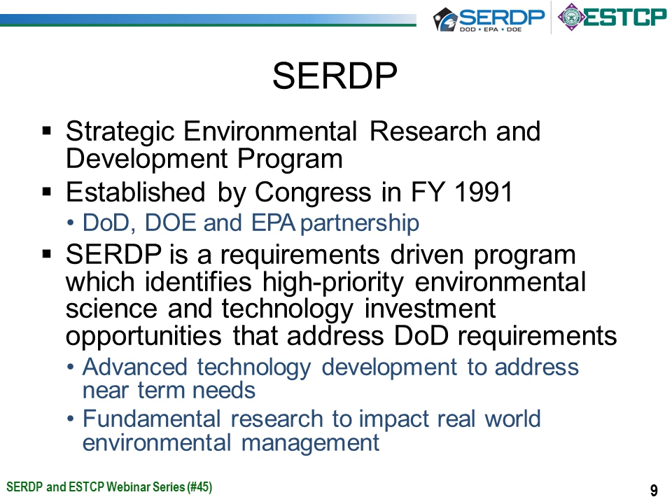Thank you, Jennifer. I'm pleased to welcome everyone to today's SERDP and ESTCP webinar. So, SERDP is the Strategic Environmental Research and Development Program, and it was established by Congress in 1991 as a partnership between the DoD, the Department of Energy, and the EPA. SERDP's mission is to identify and address high-priority environmental science and technology opportunities that focus on DoD requirements. SERDP funds both fundamental research as well as advanced technology development, which can ultimately impact real-world environmental management.

ESTCP is the Environmental Security Technology Certification Program. In this program, we demonstrate innovative environmental and energy technologies. These investments capitalize on past investments under SERDP or other research programs, which are designed to transition technologies out of the lab and into the field. Especially important in all ESTCP demonstrations is the ultimate transition to implementation and regulatory acceptance.

SERDP and ESTCP are complementary programs, with much of SERDP research and development occurring at the lab and pilot scale, with occasional field efforts, while on the other hand, ESTCP demonstrations are primarily at the pilot and field scale, although occasionally supporting lab efforts are conducted.

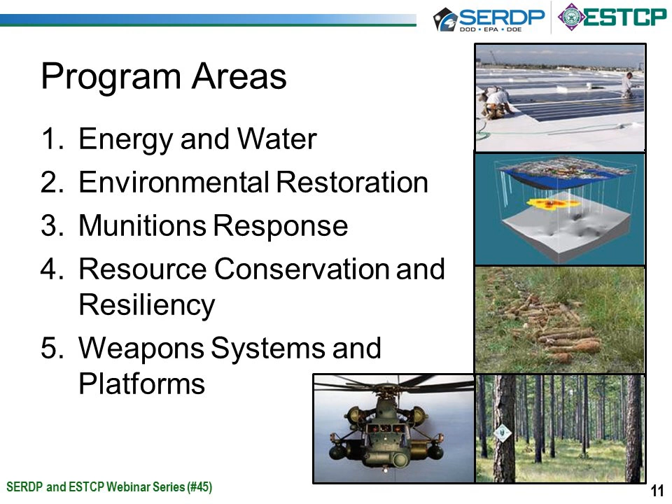There are 4 program areas in SERDP and 5 in ESTCP. Energy and water program areas are only in ESTCP, while the other 4 - environmental restoration, munitions response, resource conservation and resiliency, and weapon systems and platforms - are SERDP and ESTCP programs managed jointly by a designated program manager.

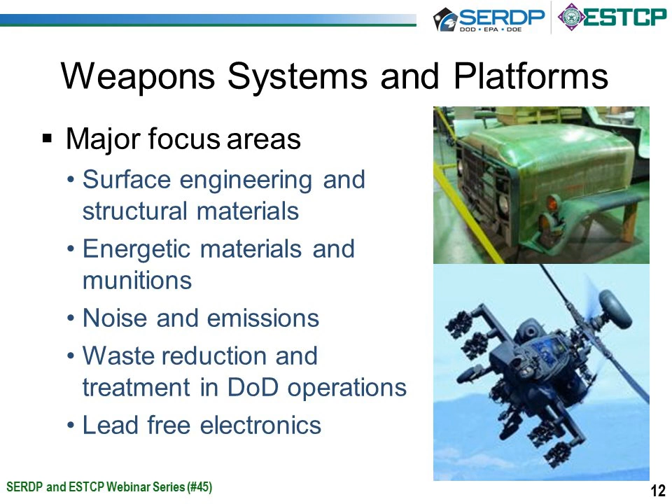Today's webinar is focusing on research and demonstrations that were conducted under the Weapon Systems and Platforms program area. This program area has 5 major focus areas, including surface engineering and structural materials, energetic materials and munitions, noise and emissions, waste reduction treatment in DoD operations, and lead-free electronics.

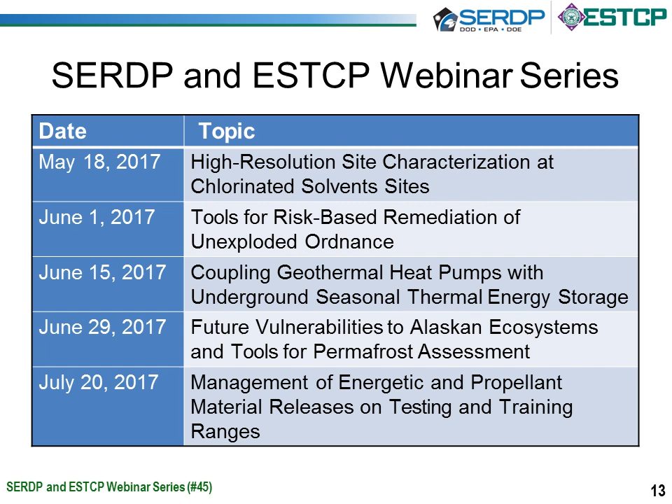Okay, so our webinar series highlights research and development efforts from each of the 5 program areas. And as you can see, upcoming webinars will cover a broad range of topics, including high-resolution site characterization at chlorinated solvent sites, tools for risk-based remediation of unexploded ordnance, coupling geothermal heat pumps with underground seasonal thermal energy storage, future vulnerability to Alaskan ecosystems and tools for permafrost assessment, and finally, the management of energetic and propellant materials releases on testing and training ranges.

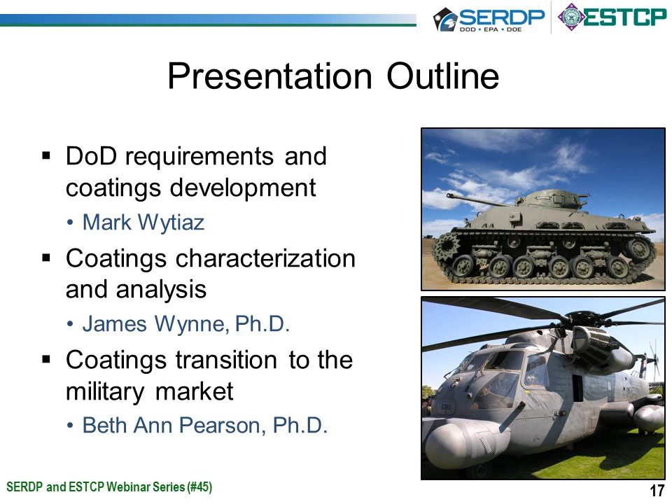So what I'll be focusing on are the DoD requirements and how we develop the coatings. So basically it all starts with us establishing a team. And it's a good time for me to say that it was a big team effort between the characterization team, which was NRL and SUNY Stony Brook. We had a very interactive relationship with them and it helped us basically get fundamental understanding of not only developing coatings, but how they really worked.

We also have a really good relationship with our focus market group, so where Beth Ann's involved, we within Sherwin-Williams pass it on from the innovation lab into the powder coatings lab for military coatings. So that product now is in a commercialization lab. And we also work very well with Estron, our resin supplier. Without them, it wouldn't have been possible to develop a new powder coating. And then last, ARL writes the specifications, tests towards the specifications, and basically makes adjustments to the specification as needed.

So the requirements were set out in a statement of need for this product, and we are talking about a chemical agent resistant coating. So the requirements are the same as the liquid chemical agent resistant coatings. However, what had to be done was a powder coating specification was written. So powder coating specification being MIL PRF 32348. Type 3 is the exterior top coat, which equals the existing liquid coating. So when these things are applied, ideally you cannot tell the difference between liquid and powder.

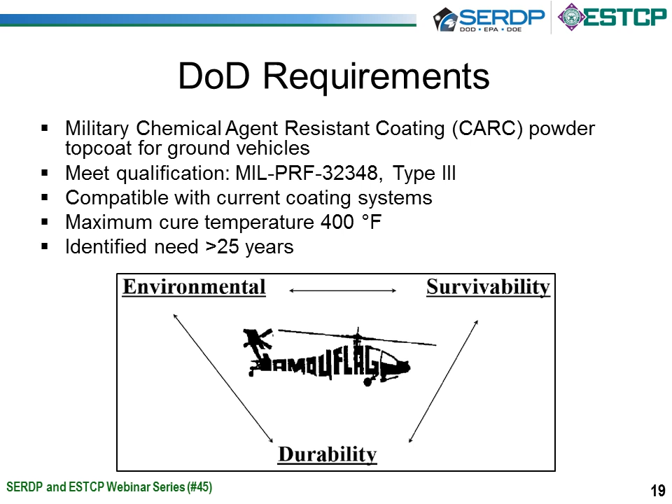No one was successful, no one was qualified, and this effort basically made it a big commitment, not only on our part, Sherwin-Williams, but on ARL's part, and with some partners and resin suppliers. It really needed a long-term commitment. So we were able to accomplish in 3 years what wasn't really accomplished in 25, by making it a priority and putting efforts toward a concentrated effort.

So the technical approach we did, our background was liquid CARC. We have a lot of liquid CARC experience. So where does this differ? I'll point out that liquid CARC has 40% solvent in it, so you have a combination of solvent, or 40%, and pigment and binder there. So you see equal parts, and we call it a pigment to binder ratio of 1 to 1 with 40% solvent. So these are typically high filler loading levels, and high filler loading levels typically make things less exterior durable, and they make things somewhat absorbent to chemical warfare agents. So we knew those were some of the weaknesses within liquid CARC, the high amount of pigment.

So the strategy on developing a powder coating was to have a binder-rich system. We're looking at 3 to 1 parts of binder to pigment, a lot less. So we're talking about low filler loading levels, and what this would lead to would be improved exterior durability and somewhat of a film that's more tightly formed, less filler pigments in there, which sort of act as a wick in absorbing some of these agents.

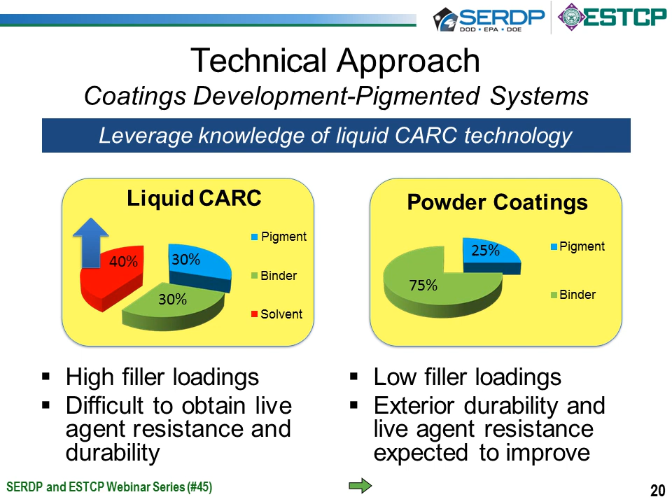And we had some background on this. We knew that powder coatings could be made flat with lower loadings of fillers, but we weren't able to meet all the requirements of CARC. So how are we able to basically flatten with low levels of pigment?

Liquid Carc resins are high gloss. So this was a fundamental knowledge that there was powder coating technology out there that could give you low gloss using resins. Not as low as chemical agent resistant coatings, but low gloss just by blending resins.

But what hadn't been done ever was meet the chemical warfare resistance properties. So the chemical resistance was not there. And so what we had to do was work with the resin suppliers and improve the chemical resistance of these low gloss resin systems. This is a big fundamental thing that we did here.

And what we really did within the program is we used clear resin systems to screen what resin systems would be worthwhile pigmenting. So it was a sort of a fast throughput way to evaluate things. So we would try to obtain good chemical resistance and low gloss in clears. So we basically made clear resin systems, checked chemical resistance using methyl ethyl ketone, and if it touched the resin system, basically if it did any effect on it, by experience we knew that this would not make a coating system that would pass the requirements in the military specifications for chemical resistance.

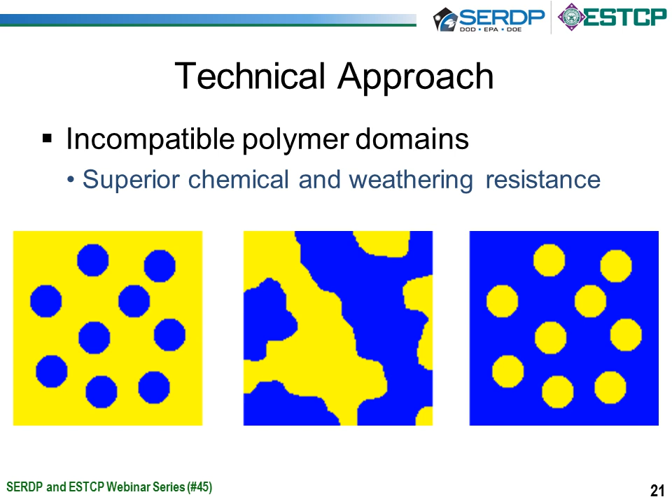The other thing that we did is we needed to have ultimately a fairly low gloss clear coating. So there had to be what we call incompatibility. And so what we see in these depictions is what we were shooting for, to have one resin system inside the other, to have a resin system that lowers the gloss. And what we ultimately found out, and you'll see later, is it created some surface roughness by having resin systems that were incompatible.

So our approach was successful. We were able to get the low gloss needed for chemical agent resistant coating. So on the right here, we basically have a depiction of what we were able to produce with resin systems. So much like the ideal depiction in the cartoon, we were able to put, there are two resins on the right, and we basically have a domain, and we have a continuous film. So we have one resin system inside the other. This would be a low gloss coating in a clear coating.

This helped us contain consistent gloss, and realistically, even though I said surface roughness was, some surface roughness is needed to get low gloss coatings, when you have a lot less pigment than liquid systems, you can get a very smooth coating for a low gloss coating.

The chemical resistance, we screen with MEK solvents in the clears. Once we pigmented, this was sent for the official chemical warfare resistance testing. Results sent back through Army Research Lab, and we were able to pass all the requirements. So there is complete acceptance of all the data performed by Army Research Lab, and we're happy to say we are on the qualified products list.

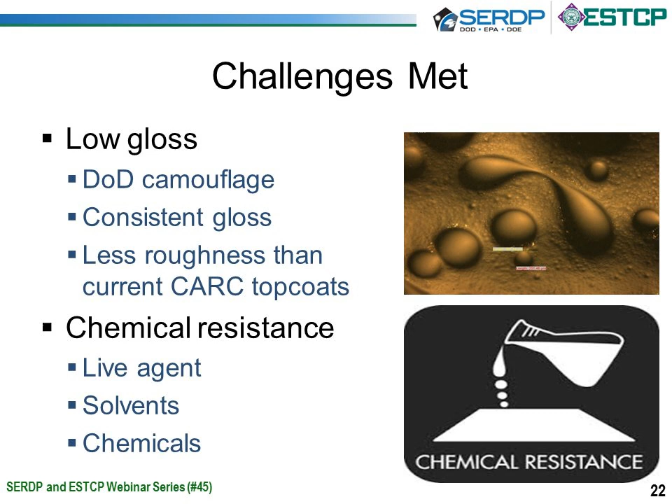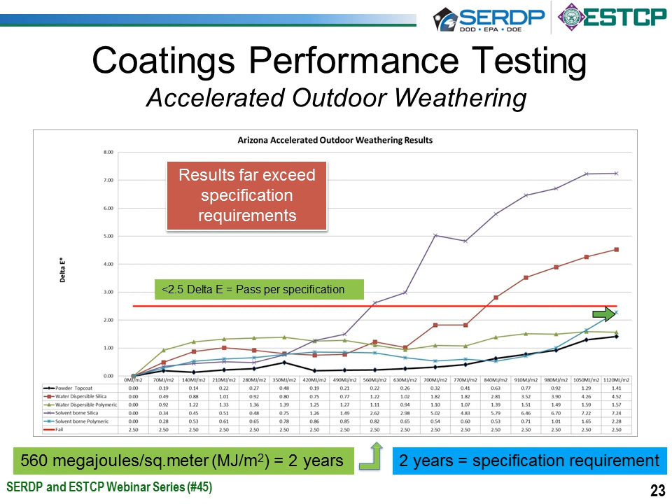One of the things I'd like to point out is that the coating is zero VOC. We've worked on waterborne before, but this is zero VOC. Excellent exterior durability means there will be fewer repaints, and really the longer a coating system can last, the more environmentally friendly it is. We're in the business of selling paint, but if the paint system lasts longer, it's a big win for the depots. The last thing we need is a paint failure on a military asset.

The powder coating does use a powder primer, and the powder primer is a highly chemical resistant, highly tightened cross-linked primer. The fact that we put a powder coating primer underneath the powder coating top coat really adds to the corrosion protection. If you buy furniture or metal equipment, everybody promotes powder coating as tough. One of the key things we point out is that the powder coating system in general is baked on, so it provides a very durable, hard, tough coating.

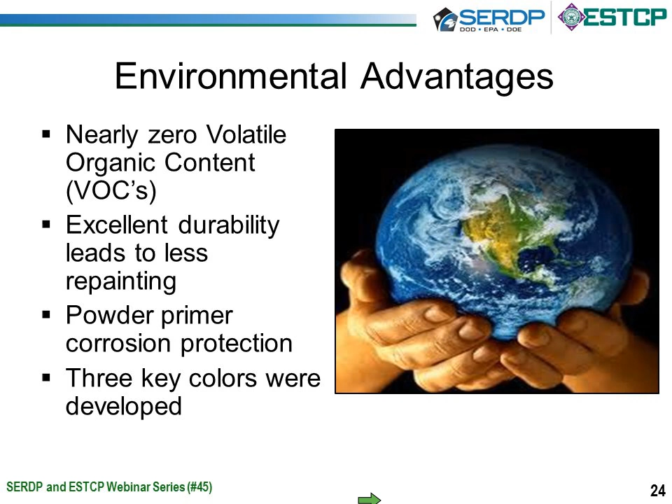We have developed this in 3 colors, and these 3 colors basically represent 98% of the business that's out there in CARC. I would have to say that not only did we develop something environmentally friendly, but as we went in CARC from solvent-borne coatings to waterborne coatings, it was noted that performance does not need to drop off just because you're environmentally friendly. We've even gone to zero VOC now, so more environmentally friendly coatings, and the performance has even gotten better. It's very rewarding to have generated not just something more environmentally friendly, but something more durable and ultimately something that will last longer.

We want to say the technical approach was very successful in meeting the end requirements. There was a synergistic effect between the incompatible polymers and the low levels of fillers, so you had to really do both. Jim Wynn will show many slides with our incompatible polymers, then slides where fillers were added, and where polymers and fillers were added together, so you can see side by side how these things work synergistically. You could not get to the low gloss without having both incompatible polymers and the flattening agents.

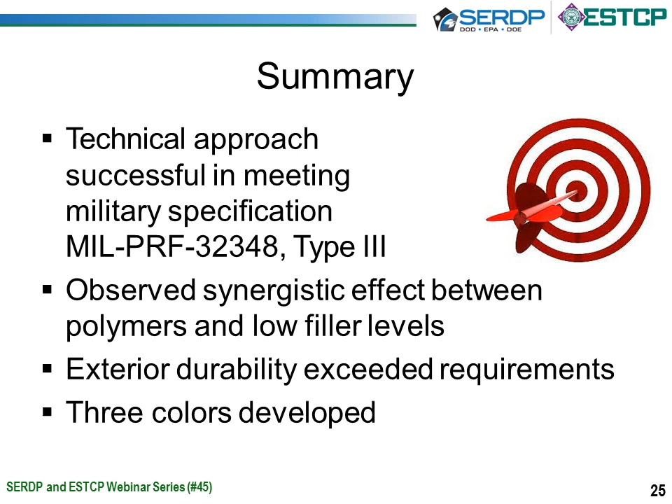Again, the exterior durability is basically state-of-the-art, leading best in class of anything, and we basically want to say that we have developed all the key colors that will complement liquid CARC coatings. Thank you.

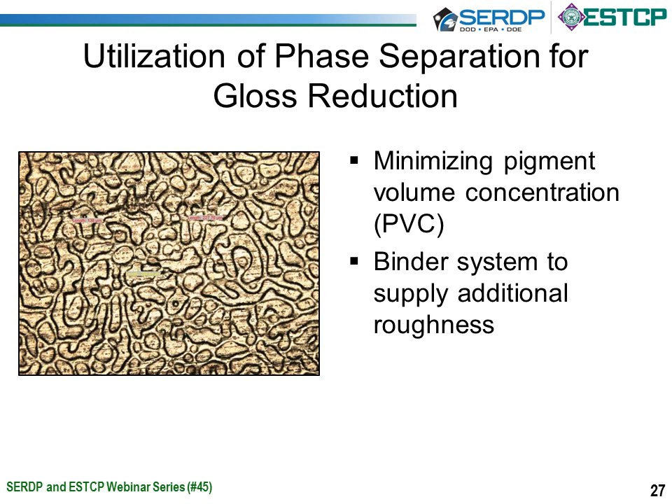Thank you. So I'll start on slide number 27 and reiterate some of the things that Mark just said. Knowing that we are extremely limited on the amount of pigments that can be successfully incorporated into a durable powder coating, we were forced to look at other methods of gloss reduction. In an effort to seek these other methods, our attention turned to the binder system and utilization of the phase separation that polymers would naturally give us if we selected the correct combination. This phase separation ideally would result in additional roughness and give the desired gloss reduction we wish to achieve for military applications. In slide number 28, we utilized polymer incompatibility.

Specifically, we wanted to take advantage of modulation of Hansen solubility parameters. We were utilizing polyols by modulating the hydroxyl pendant group content. In one case, we were looking at fairly high OH content and combining those with low OH content polyols in order to try to achieve a phase separation or incompatibility. By modulating the Hansen solubility, we can exercise control over dispersion, polar, hydrogen bonding, and other interactions. This ability to mix and match definitely played into our favor for this application.

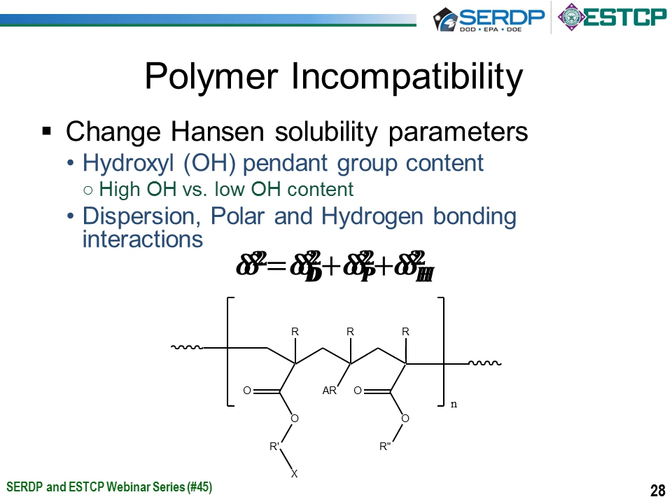Slide 29: in order to prove this concept, we took the high OH and the low OH polyols and wanted to demonstrate that when combined with no curative, upon heating they would demonstrate phase separation. We took the high and low OH polyol in a 1-to-1 ratio, co-extruded it, ground it, and sieved it to a uniform particle size of less than 100 microns. We electrostatically applied it to Q panels as one would a typical powder coating, with the objective to show that the high and low OH without the curative would phase separate.

We heated it for 1 minute at 400 degrees Fahrenheit, then quenched it by placing it upon a cold surface. This optical image shows that phase separation did occur in as little as 1 minute. I want to point out that the horizontal lines shown are simply the aluminum panel onto which the clear polymer was applied, as these are optical images and we're able to see through the polymeric film. We know these are polymer domains because the particle size applied as the powder through electrostatic application would be less than 100 microns, and as you can see from the scale bar, this is clearly much larger than that. So we are forming polymer domains.

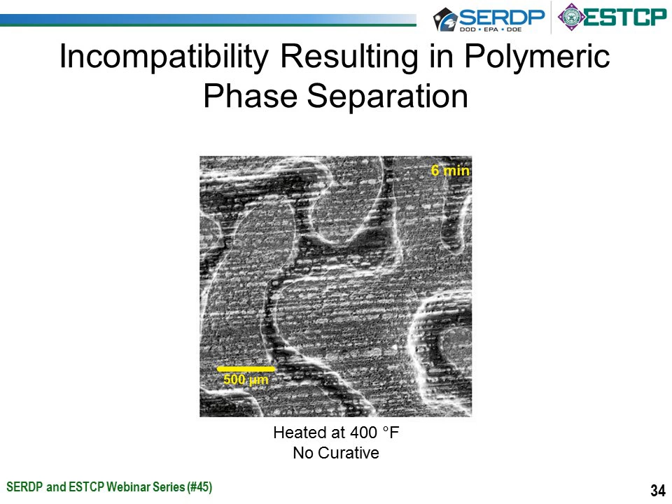In slide 35, we wanted to utilize this incompatibility and cross-link these high and low OH polyols into a durable urethane system. We selected isocyanate as our curative because it's frequently commercially available and has been utilized in many commercial applications to cross-link polyols. We selected urethane because it was reactive with the polyols and would afford a very durable, chemical-resistant coating.

We knew that phase separation occurs in the polyol, but what would happen once we started to cross-link these polyols with the isocyanates? We had to be very careful because there was a delicate balance between the increased viscosity from the additional cross-linking and the phase separation we wanted to incur. By increasing the cross-link density, we were able to trap the domains in place, and this greatly limited the mobility in the curing process.

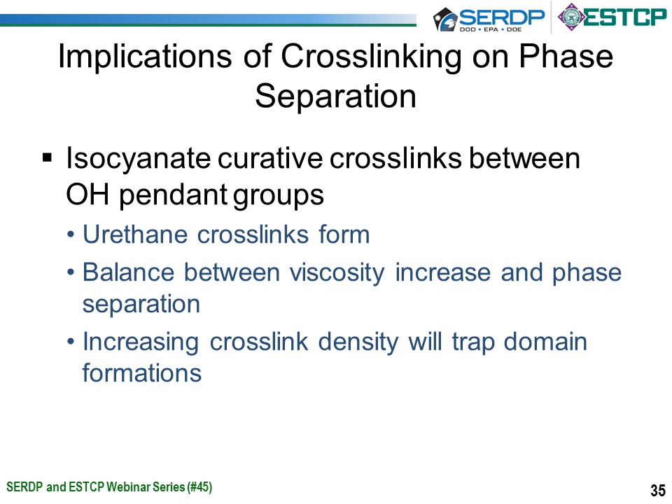If we go to slide 37, we see that phase separation continues. At 2 minutes, surface roughness is increasing, but still we have a continuous film. It's important to illustrate that we must afford a continuous film that completely coats the surface, in addition to providing the topographical surface roughness to achieve the low gloss. There's no obvious sign of domain formation in the image, and we believe at this point it's still a melt flow process given the even coating of the surface. Likewise, we believe the deblocking of the protected isocyanate is just starting to occur.

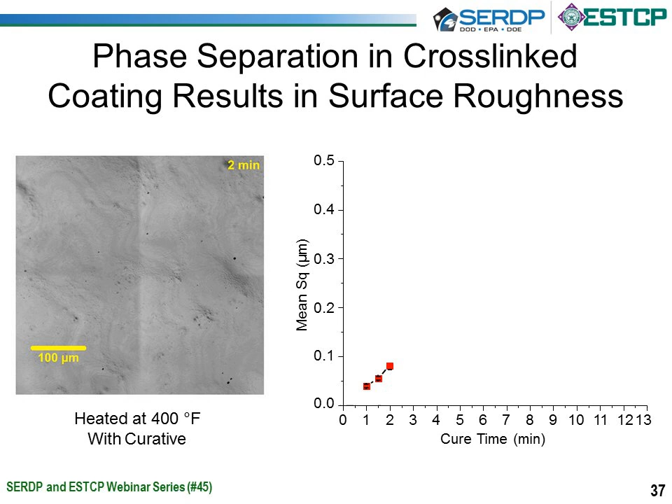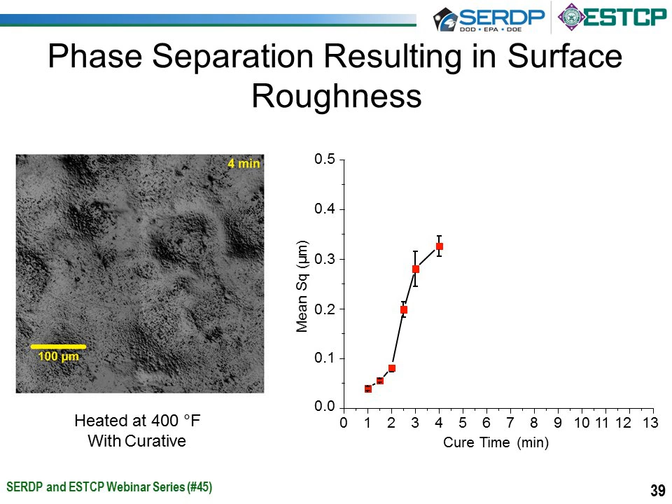Flipping through slide 39, as we continue to heat at 4 minutes, the surface roughness increases, albeit at a lower rate. In slide 40, at 6 minutes, we've progressively increased the roughness, and we will increase the roughness, as you'll see in slide 41, up till 9 minutes. We believe this increased roughness results from the continued reaction and continued phase separation that's occurred.

Overall, we're overcoming the thermal process of deprotecting the isocyanate, the pressures involved in the cross-linking or expansion and contraction of the polymer, gravity, and any other bulging effects that are resulting in the domain formation.

Eventually, we realized that the greater viscosity results from a higher cross-linked system, and therefore the individual monomers or polyols are less likely to be able to move to form a smooth surface, as observed in slide 42.

At 12 minutes, you can see a slight decrease in the surface roughness. We believe this reduction, albeit slight over the 9 minutes, is the polymer system being locked into place, yet continuing to react or cross-link with the resulting unreacted moieties that remain. Because this is above the glass transition temperature, segmental motion is resulting in this slight rearrangement and lowering of roughness.

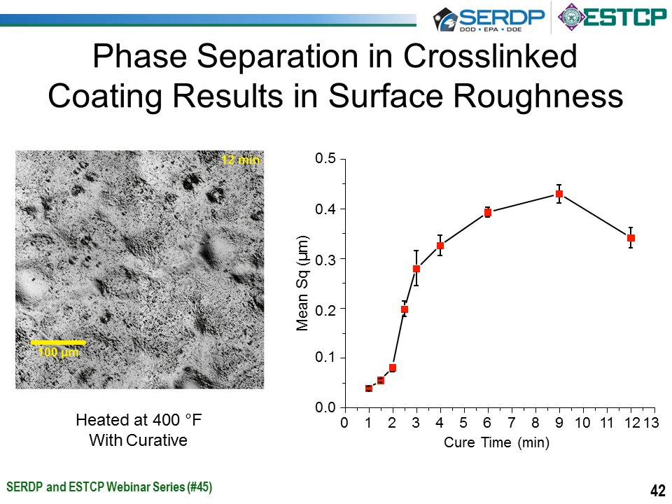In slide 43, in order to confirm what we believe and had observed through surface roughness measurements, our attention turned to thermal analysis.

It was specifically DSC. We can see on the right side that we start off the polymer with a glass transition of approximately 60, and this is very consistent with commercial powder coatings, in that a relatively high glass transition is required to ensure thermal stability on storage.

However, as we start to cure the polymer coating, we see a second glass transition appear at approximately 3 minutes. This appearance of the second glass transition temperature confirms the domain formation as we originally believed. And this continues to increase the glass transition past 8 minutes, which also confirms that we have continued cross-linking systems even after the domain has formed, which is essential for the durability of the coating system.

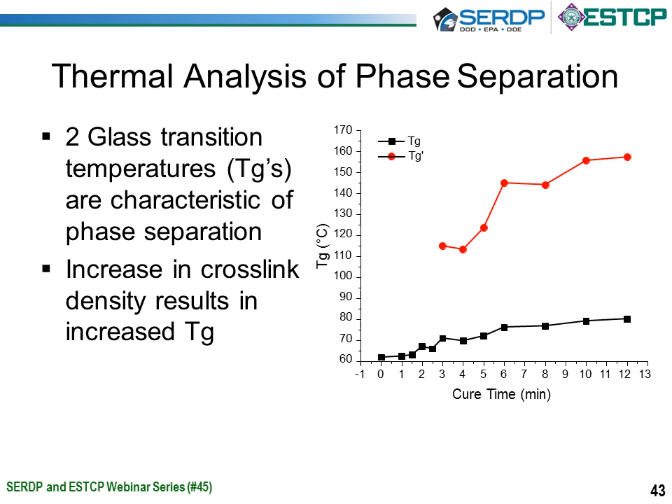On slide 44, any real coating system, as Marc alluded to earlier, must require pigments. In order to determine the effect of the addition of the pigments with respect to what we've just seen previously, the clear coatings without the pigments and fillers, we decided to turn our attention to the addition of the fillers, in particular here, carbon black, to result in a black coating system.

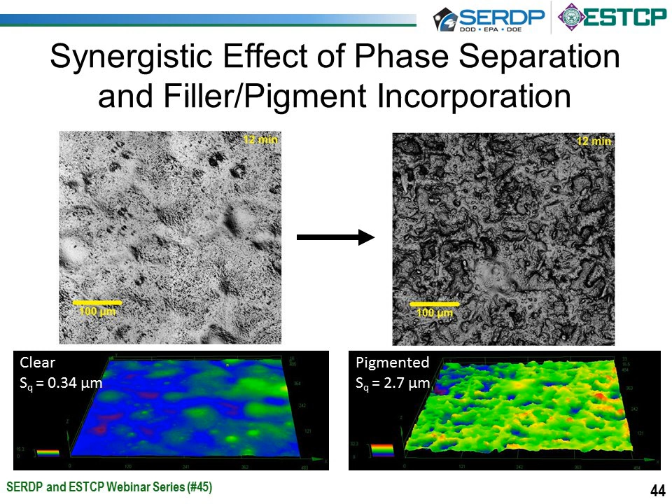We've demonstrated at this point the incompatibility of the polyols alone without the curative to form the domains. We've demonstrated that in clear systems we can cross-link them to result in rough textured systems, and now this illustrates that through the addition of pigments that we can even further increase the roughness of the coating system and result in a lower gloss system.

Although it does decrease slightly in roughness after the 4 minutes, again, this is a necessary evil, to sacrifice slight roughness of the texture of the surface interface in order to achieve a very cross-linked durable system, which is essential for the chemical resistance.

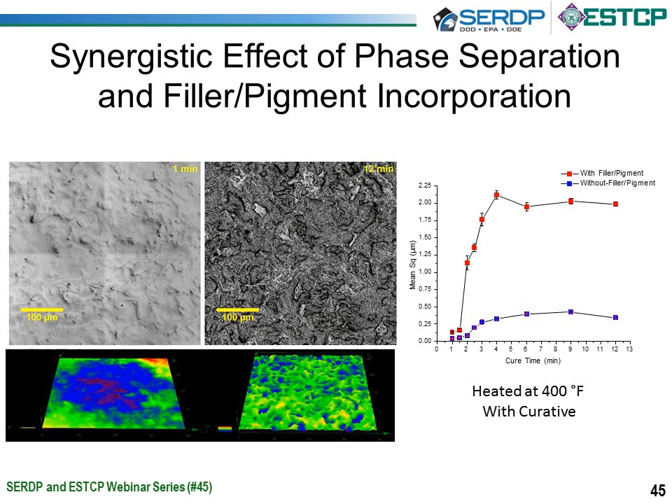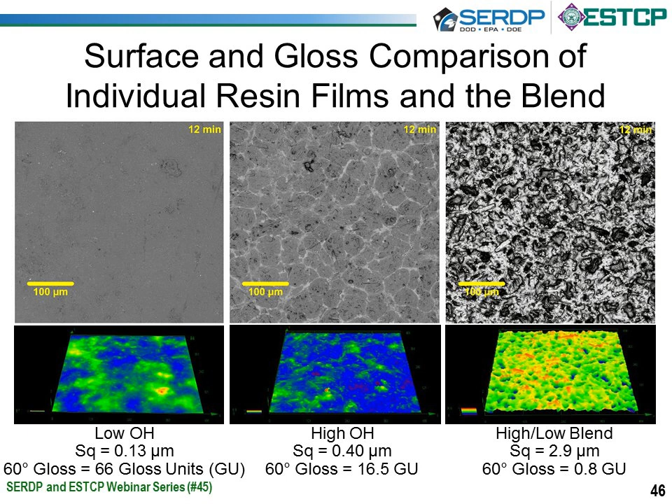So clearly there's a synergistic effect of the addition of the pigments with the polymer phase separation, and that's how we've been able to characterize this, where the flattening agents, the fillers alone, were not able to achieve that.

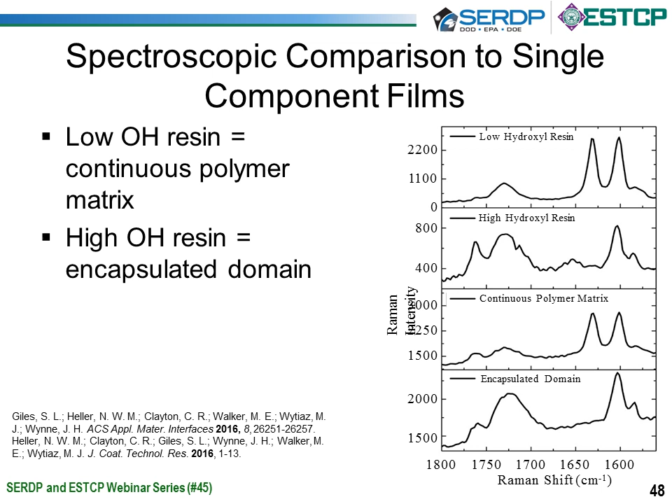And finally, we've been able to identify the domains themselves and their composition, and associate a low or high OH with the corresponding domain and pigment and continuous film. And that concludes my portion.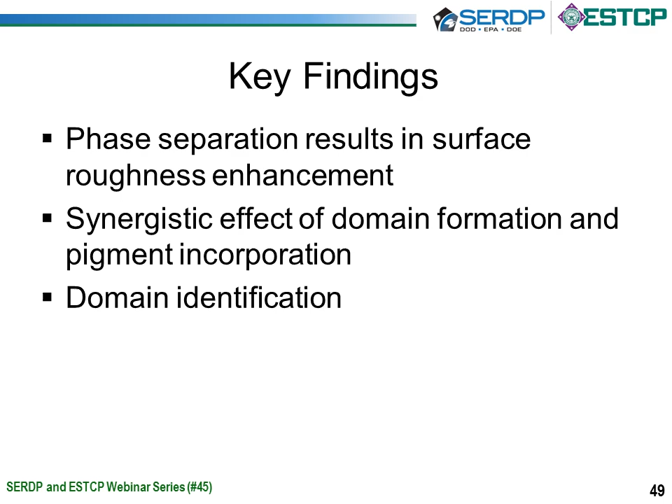Jim, the first question is for you and follows what you were just talking about. The audience noted a reliance on polarity differences to provide phase separation in the coatings. Do you anticipate or have you observed problems in morphology stability with solvent resistance or cleanability where solvents might interact differently with each of the domains?

It's a good question. No, we really have not. I think we were fortunate to start off with a fairly robust system that yielded a very cross-linked tight network. As a result, the resistance to chemical solvents and so forth has not been a problem.

Marc may add some previous work comments on that if he wishes. I would just say that, individually, when the two resins are applied separately, yes, there is definitely attack of solvents to the low OH, the continuous film. However, when they are put together to make these incompatible domains, it is somewhat surprising, but when we test the resistance to that, the domains stay intact. There is no destruction of the coating system whatsoever. So the solvent is not touching anything in there, and we keep the morphology.

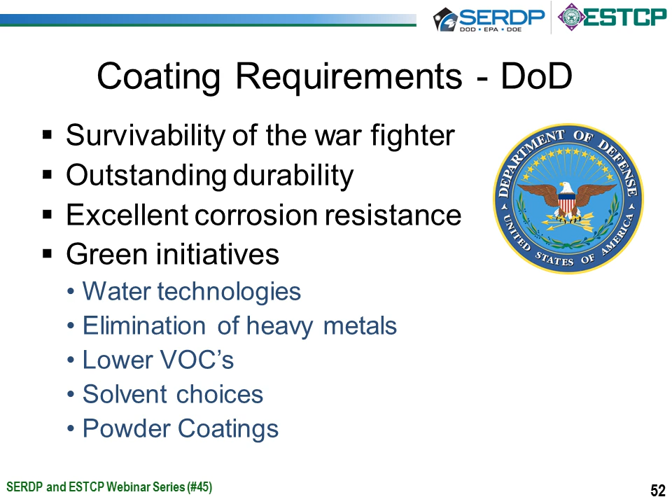Not listed last because it's least important, but listed last because we're going to move it that way, are powder coatings. Having the use of powder coating means we have less waste to the environment. That being said, why was there an identified need for a powder technology? Why would an applicator, an OEM, or a tier supplier even be interested in using powder technologies?

Well, I said lean and mean and green — near zero VOCs. Some people say powder coatings have zero VOCs emitted to the atmosphere. I'm going to say near zero because there is a risk, and I don't want to mislead — there is a risk that any powder technology, any resin, may have a minimal amount of solvent still remaining in it.

So it's virtually zero, but to be absolutely correct and upfront, it's better to actually say near zero VOC.

With powder coatings, you can get higher film builds. If you exceed the film build of the performance of a rheology-controlled liquid coating, you start to see sags, or you may see pops, or you'll see runs and drips. With powder coating, when's the last time you really easily see a sag or a drip coming off of the part? So you can get higher films typically with a powder than you can with a liquid. And you can do it in a single coat application. You don't have to do the flash time or the bake or cycle time. So a single application saves time.

You can get specialty effects. When's the last time in a liquid coating, if you see, for example, a textured effect, it's typically not a good thing. But when you see it in a powder, it's intentionally formulated to be applied that way.

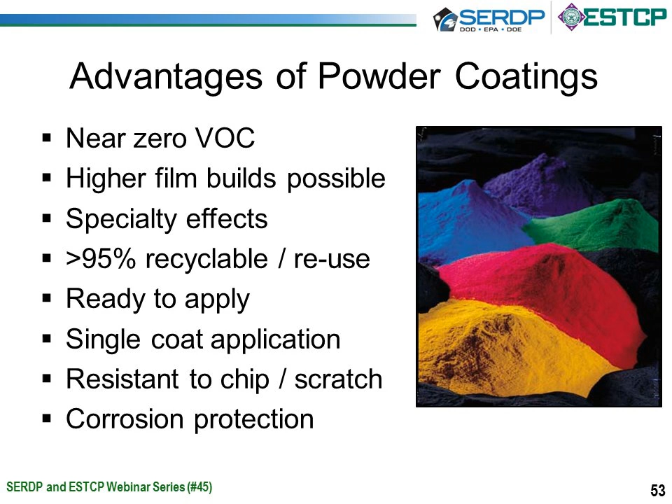Ways and means that powders can be applied. For example, the Faraday cage effect with application allows the electrostatic wrap so that those corners of a part that are difficult to coat or difficult to achieve the correct film build on is much more effective to do with a powder coating. You're not getting too high of a film where you're getting dragged, and you're not getting too thin because you're not getting enough electrostatic wrap to it. So powder coatings are known for improvement with that.

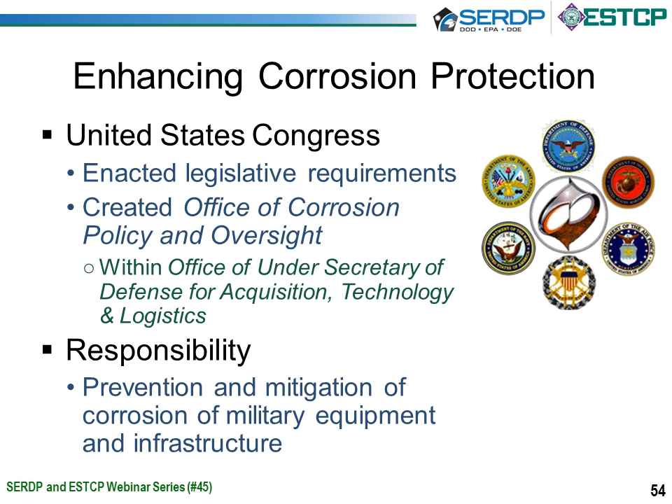So when I talked about the $23 billion cost, our Congress enacted a legislative requirement where, sitting within the Office of the Undersecretary of Defense for Acquisition, Technology, and Logistics, was created an Office of Corrosion Policy and Oversight. The majority of the focus of this office is to prevent and mitigate the corrosion of military equipment and military infrastructures. In other words, to decrease that $23 billion cost, to get the number smaller, to put the money back where it should be.

So if I take it back to the costing or to the actual purposes, I talked about application efficiencies - wrap, electrostatic attraction, Faraday cage effect. With powder coatings, you get increased transfer efficiency. The benefit to that is exactly what it sounds like: the paint that you're trying to get on the part, you get on the part. If you don't, you can recycle it and put it on the next part that comes around. So you get higher transfer - it's not going up the stack, it's not going out.

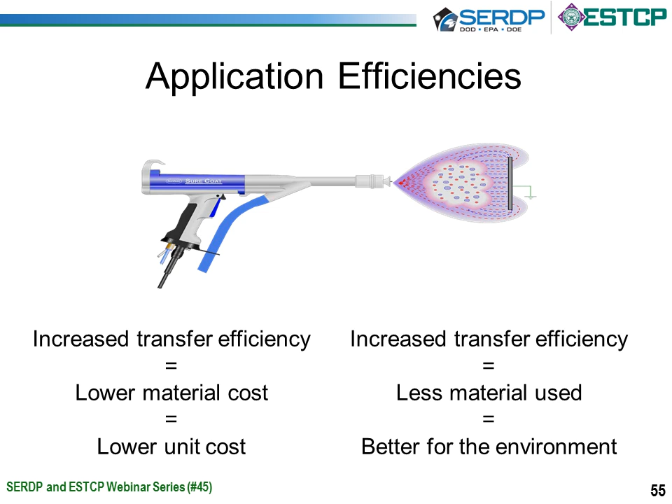With liquid technologies, someone who's running a liquid line has to worry about insurance, for example flammability, because you've got the solvents in your facility. I'm not saying there isn't insurance that gets covered for security and safety, but you're going to have lower insurance costs because you don't have to worry about the flammability. You're not emitting VOCs out into the atmosphere like you're doing with liquid. So you're getting more efficient use and lower costing. Lower material cost means you get less material used. Lower unit cost is an overall wrap, better for the environment.

So where did we end up? Marc and Jim had both talked about where we started, how we moved, to our final product. The fast cure means fast production. So a typical coating, if you're looking at, for example, a military coating, it's a 250 bake for 30 minutes. Or if you're looking at an ambient cure condition, it can take 4 to 7 days, or up to 10 days, depending on the technology you're using. Fast cure means fast production.

The technology developed through this program requires a 10-minute bake at 400 degrees max. That's metal temperature, important to note—not 10 minutes sitting in an oven set at 400 degrees, but 10 minutes of the metal temperature that the coating is applied to. We need that 400 degree period to ensure proper cross-linking for the full cure.

That way, when the paint is taken out, you can be assured of the full cure of the technology—not a semi-cure that then becomes fully cured once applied to the asset, or one that must sit around continuing the reaction for days. After 10 minutes, the product is fully cured.

Marc talked about, through the development of the program, using MEK—methyl ethyl ketone solvent—rubs as an assurance that correlated back to cure. That's how we were able to come up with where we are and where we've been. As for product maintenance, once it's cured you don't have to leave it sit around, so it's ready to go right out of the gate.

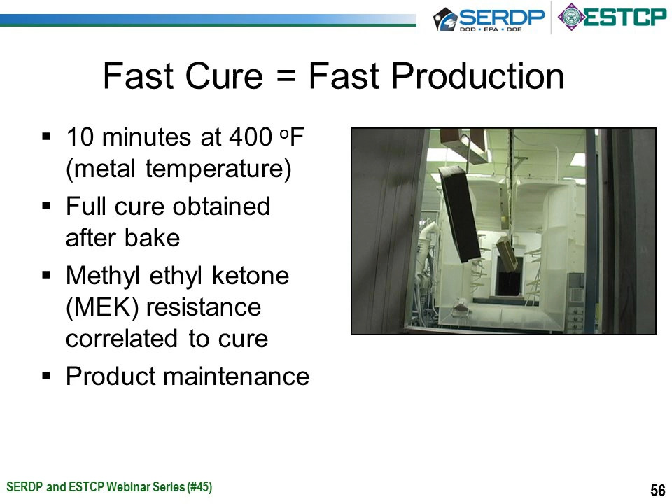So it talks about the products having been manufactured or ready to go. Where do we move from here?

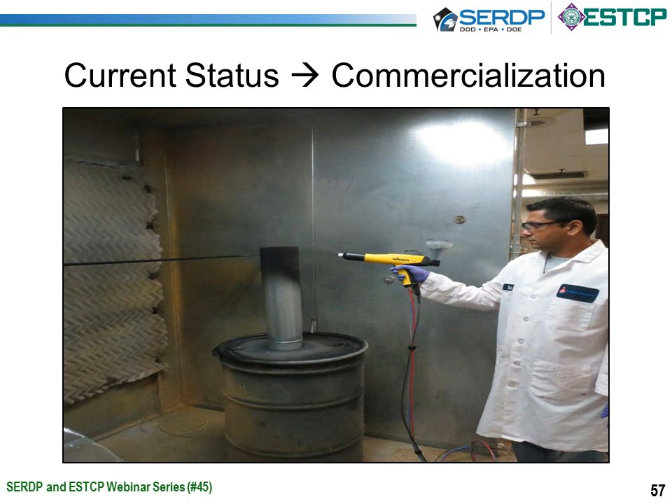Well, current status is actual commercialization. And how I get to that—you can see this slide is simply a picture of the coating application as we were managing it.

Colors were developed. Over 95% of the military assets applied in the last year actually consist of the 3 primary camo colors, and I'm not including brown in the camo.

So if we look at TAN 686A—for those not as familiar with the military lingo, that's actual federal standard number 33446. Any number that starts with a 3 in a federal standard means it's a flat or lusterless color.

So TAN 686A, green 383, which is federal standard 34094, or black—the Army Research Lab specification allows for aircraft black or black to be used interchangeably.

So when you see Federal Standard number 37030 or Fed Standard 37038, those two colors may be used interchangeably. That's the third color that was developed for testing.

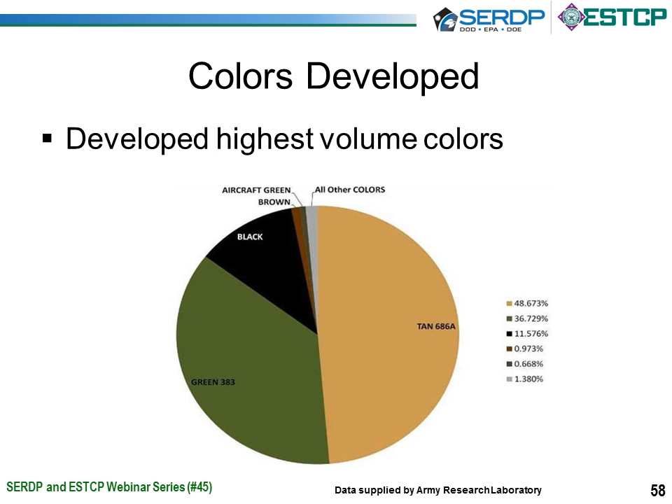Before a product is taken out for commercialization, we want to do our homework and ensure we're ready to have it commercialized. So there are two steps to commercialization.

One is: can the product actually be scaled up? What it looks like in a 1-gallon container on the bench—am I going to get the same product when I look at 3,000 gallons in a reaction blend system? Second is: does that paint apply the same in a laboratory environment as it does in an application center, as it does on a customer line?

So that's the development for commercialization that I'm talking about. For this case, we employed...

...design of experiments, DOE. We applied statistical analyses to be able to understand and predict the behavior of the coating. There are different types of statistical experiments that allow for this, and we employed screening designs as well as surface analysis designs.

These DOEs allow us to really understand the robustness of the system. Think about defining the edges of the box of how the product is going to scale and then how it performs, and you identify the critical aspects that need to be studied.

Various substrates—we don't want to limit it to just looking at, for example, cold rolled steel or blasted steel. It's looking at any of the substrates that we expect the coating to potentially be applied to in the field.

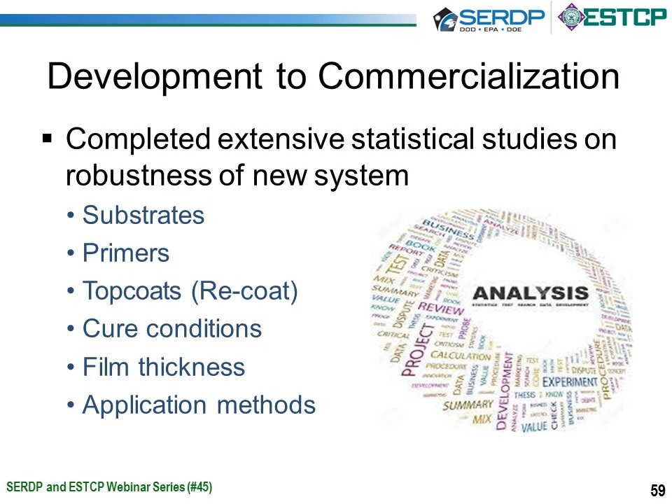We all know in an ideal world, the military specification has a specific film thickness identified. We want to understand and recognize that those ideal conditions aren't always followed. So if we go above film, below film, what's the maximum, and what happens once we get outside of that range.

So these statistical designs we're talking about, we verified the gloss retention. As Mark mentioned, the gloss is very low, and how low do we go? The adhesion, the physical properties identified in the mil spec. There are several, including flexibility, agent resistance, and solvent resistance, how all of that works.

What happens with overbake? A perfect example is we said you need a minimum of 10 minutes at 400 degrees metal temperature to achieve cure. We actually had a study where we left the coated panels in for 16 hours at 400 degrees, simulating what happens if an oven shuts down and you go to lunch on a production line. We saw only a minimal color drift, and the drift was still within the allowed range of the specification.

And finally, that's the result of how we arrived at our recommendation of 2 mils of film thickness. So to summarize, we have developed a powder that maintains all the physical, appearance, and application properties that are defined, under the conditions under which it can be applied.

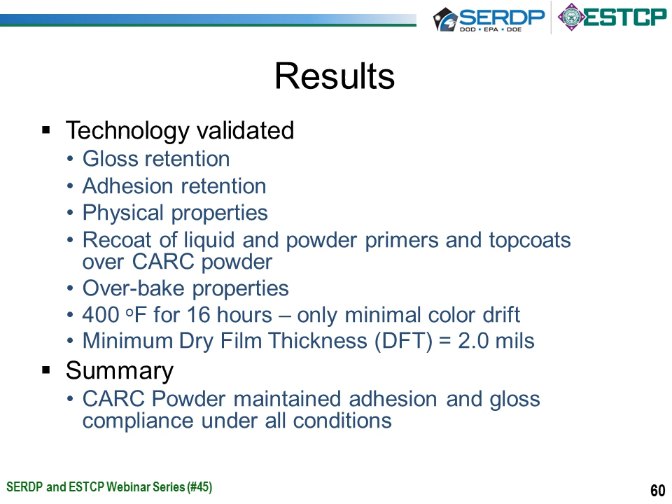So that's the first stage of commercialization. The second stage is the application part. Again, it may apply in an ideal condition in the laboratory, even being able to vary conditions there, but how do we take that and apply it into a real life situation?

For those who aren't familiar with STAR 4D, in Cedar Falls, Iowa, there is an application center called the Spray Technique Analysis and Research for Defense, known as STAR 4D. They have application equipment as well as experts in military coating technologies. They know the market and the different challenges, how the coatings can be applied, the different substrates, and all of the different conditions.

So we sought their assistance. We took a finished prototype, laboratory and production sample, and had this analyzed at STAR 4D. In other words, have at it. We handed them the paint and said put it through its paces. We did the same thing to really understand and ensure that we were not testing the product on our customer's line. We were doing our homework before it actually got to the customers.

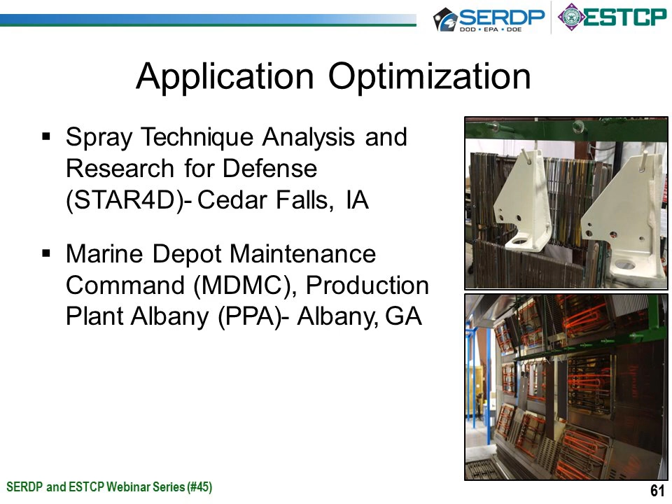After the STAR 4D analysis, one of our partners was Albany, the Marine Depot Maintenance Command Center from Albany, Georgia, the Marine Corps base. Steve Allen is our identified partner, and we worked with Mr. Allen to take the sample and actually look at it on his customer line. So we went from the concept of working in a laboratory to an application center to an actual customer line to be able to adjust.

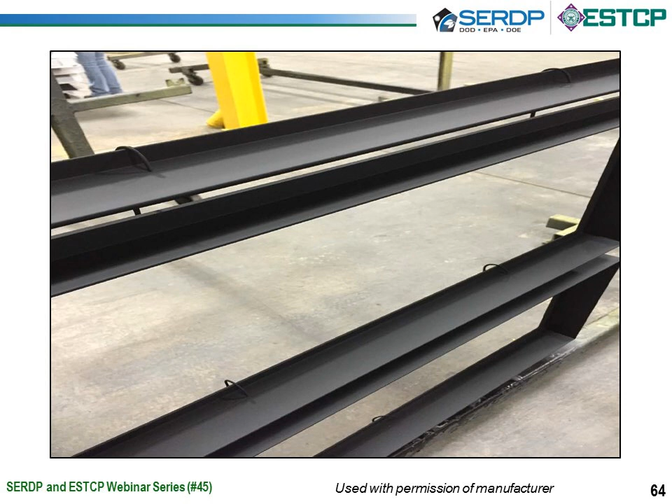A different piece of equipment, again this is CARC powder. We have a customer who was kind enough to let us show where we're actually selling this in real life. This is black CARC, again being applied to military maintenance, shown here in a real life application setting.

I just wanted to give you a little bit of flavor to show you that these technologies are indeed verified, validated, and commercially available.

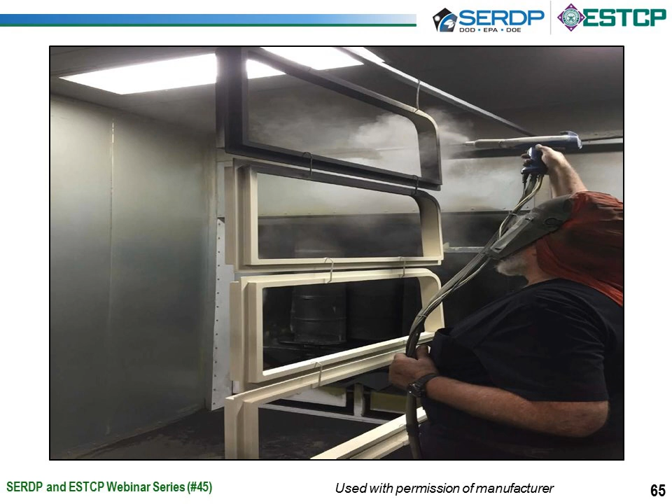So to sum it up, I say mission accomplished. The call for need was identified. It had been marketed in the industry for several years, kind of chased after as a desire, but had not been successfully achieved. There were a lot of prototypes I've seen in the market space that are not so attractive, and that's the beauty of something like a SERDP ESTCP program—it allows, in some cases forces, the priority to a project for a defined need to actually perform the hardcore research and development to learn the technology and take the time to really understand what we're developing.

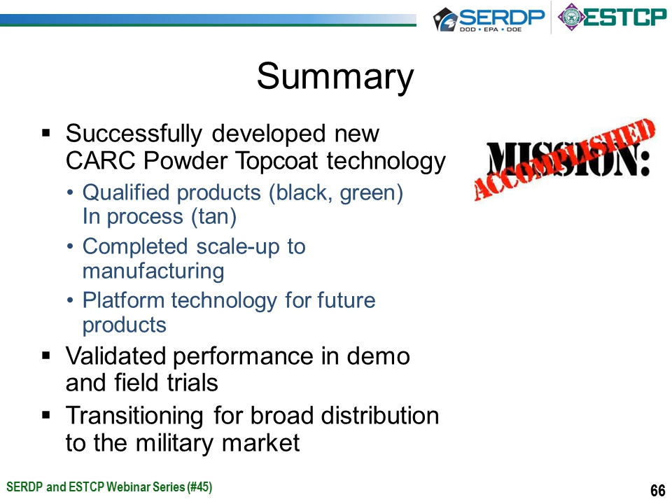As a result of this, Sherwin-Williams, through this program and working with our partners, has successfully developed a CARC powder top coat technology that is approved and listed by the Army Research Laboratory on the QPD. The slide's a little bit out of date—we now have qualified products in black, green, and tan. The scale-up to manufacturing has been completed. The platform technology has been completed, and there are commercial sales currently ongoing for the past several months. Now that the platform technology is understood, it's expected to be leveraged for future products we're currently looking at. It's been validated, and there are discussions on how this will transition to broader markets within and even outside of the military.

So I hope that gives you a little bit of a feel for where we are from a commercialization standpoint.

Sherwin-Williams, I'd like to acknowledge our team. As Mark started off by saying, we had a very strong team that worked together. From my organization, Mr. Marc Whitehead was the primary investigator leading it, worked with Mr. Mark Walker, Edmund Mann, Don Gruska in the laboratory, and Dr. Morgan Sibold from our Sherwin-Williams team. From the Naval Research Laboratory, Jim Wynn gave part of the presentation. His associate Spencer, now Dr. Spencer Giles, worked with us. From the Army Research Lab, efforts were led by Mr. John Escarzega for his technical input, coaching, support, and idea development, as well as Mr. Daniel Pope, who is on John Escarzega's team, for a lot of the testing and supporting documentation and technical expertise. I talked about Steve Allen from the Marine Depot production plant at Albany, Georgia. Estron Chemical was our industry partner for resin development, led by Dr. Robert Auerbach and his associate Mike Miller. And finally, our academic partners working with ONR heavily on commercialization and testing, from Stony Brook University in New York, was Dr. Clive Clayton, and again now Dr. Nicholas Heller. We want to recognize all of our team members.